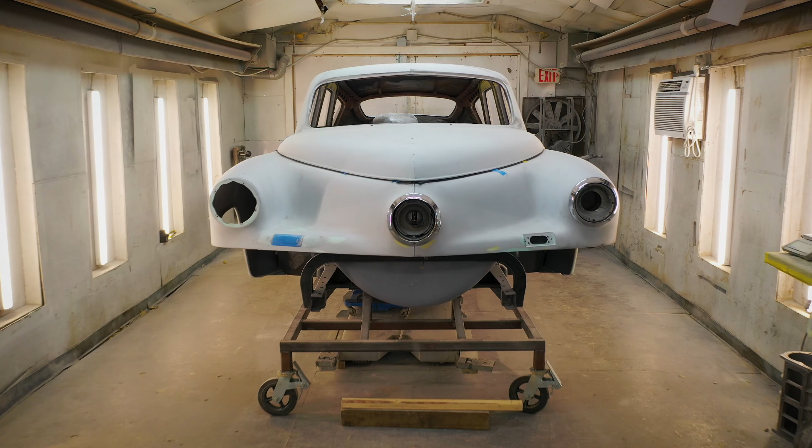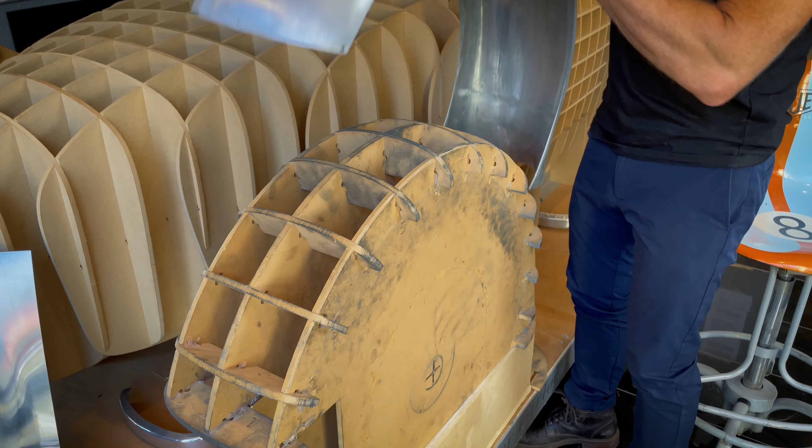It's very exciting to bring history to life. And that's a hard thing to do. All of the components that create a car need to not only look the part, but they also need to work in harmony. They need to fit within that body with no compromise to the design. And the one area that just seems to be stuck in the dark ages is the metal shaping. I mean, we're still shaping metal the way the guys did those armored suits.

So just in time of making visionary engineer Preston Tucker's mythical car, along comes Figur.

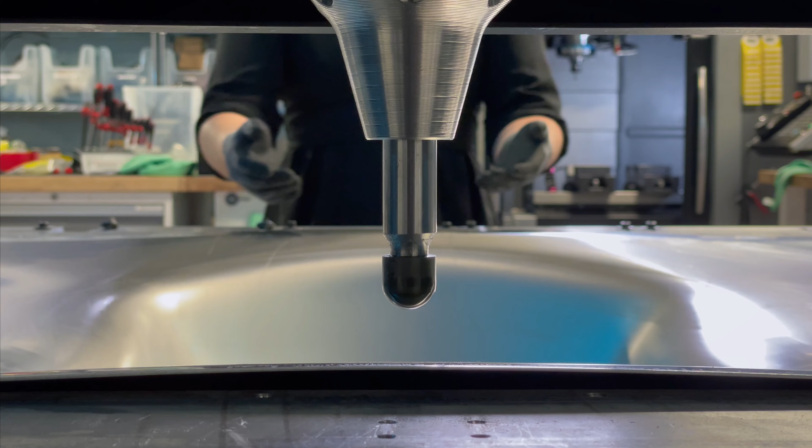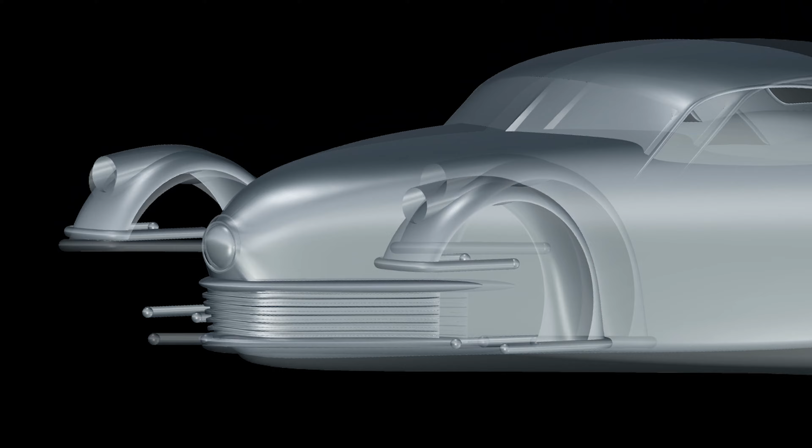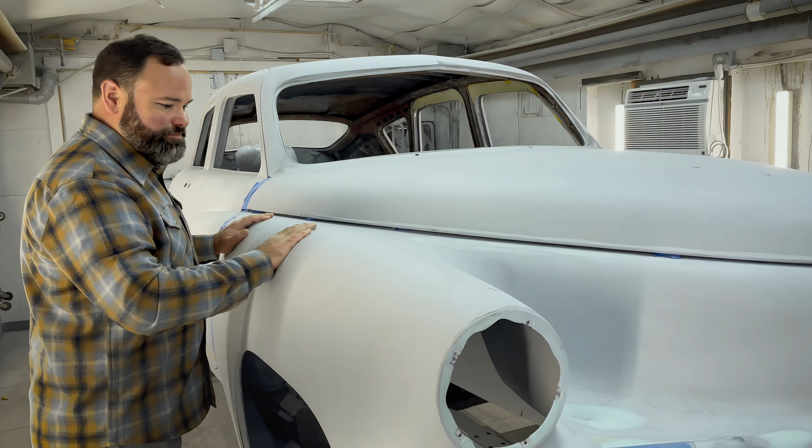Preston Tucker was a visionary, and if you're a car person, you know about him and you have studied the things that he did. He was everybody's hero. After World War II, my great-grandfather, Preston Tucker, started a company called the Tucker Corporation, in which they developed a car called the Tucker 48. They called it the car of tomorrow today. He took advantage of public interest in a new automobile after World War II, delivering what people really wanted in a car that was safe, it had performance, it was affordable, you could use it with your family.

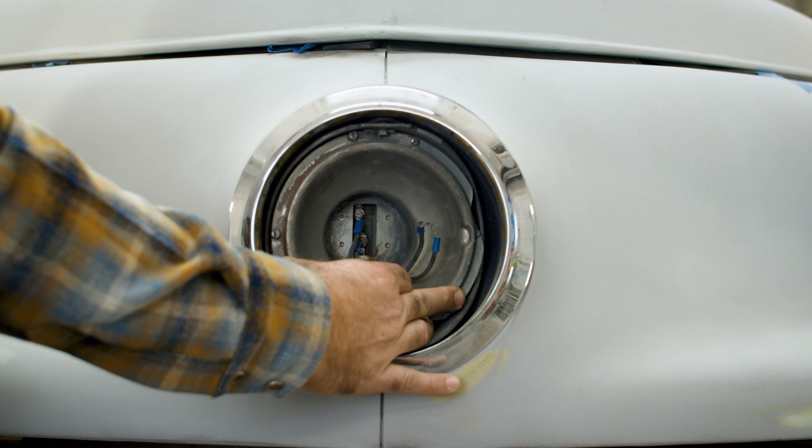So Preston Tucker was really 20 years ahead of most of the innovation that was happening at the day. My grandfather was a dealer for Tucker. He bought a dealership in New York. And for the rest of his life, he talked about how exciting that was, how many people came to the showroom, put orders in, expected to get a car that was like no other.

But that didn't happen. Eventually, some of his more creative fundraising techniques got him in a little bit of trouble with some of the government agencies that were paying attention, and they ended up putting him on trial for fraud. The good news is he was found not guilty, but unfortunately his company was destroyed and went bankrupt at that time. After the 51 cars were made, the factory was closed down and Tucker was out of business.

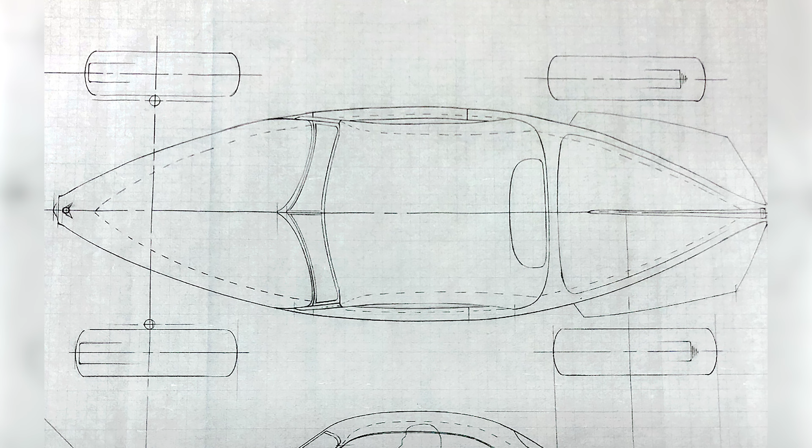So a normal person maybe would have been fairly discouraged, but Preston Tucker decided that he was just going to work on his next new big idea, which was the Tucker Carioca. It's a boat tail fuselage, two-seater, motorcycle fenders, exposed wheels, rear air-cooled engine. So he was going to produce the car potentially in Brazil in kit form and have them imported into the United States and assembled at local dealerships, so that somebody could have kind of a neat little fast two-door sports car that was inexpensive and had all the things that people were looking for.

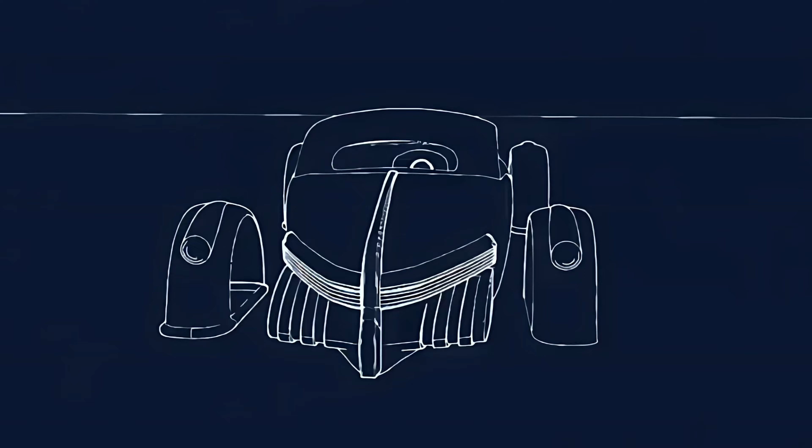Unfortunately, he died before the project was really able to get out of the industrial design phase. The Carioca is the manifestation of his last design, his last concept.

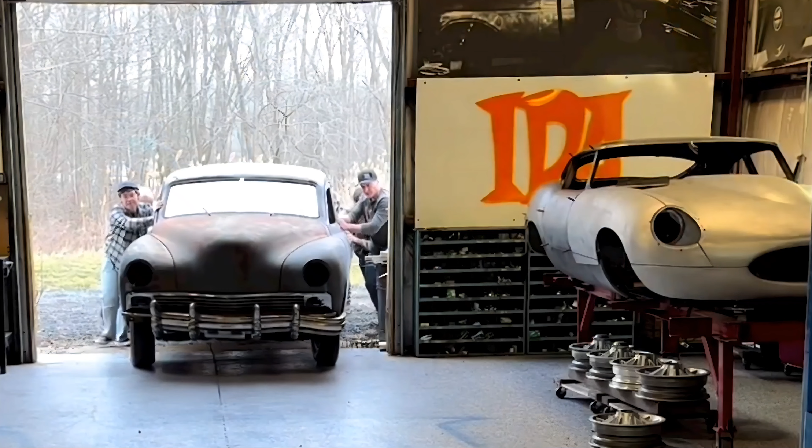So the Ida family has been involved in Tucker since the beginning. The love for the car and the product and Preston Tucker's ideas stayed in the family, and it's been a part of who we are. We have a custom shop here in New Jersey where we custom make vehicles, hot rods, and other concept cars. And we've decided that it would be a lifelong dream to own and create the Tucker Carioca car.

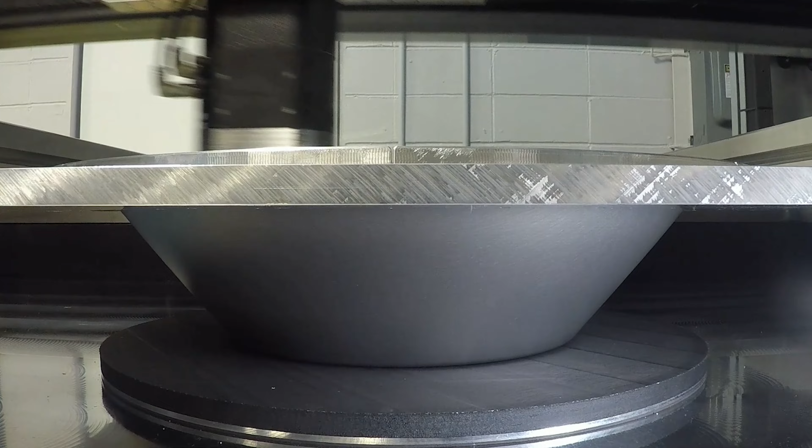And thanks to Figur and the CNC magic of metal shaping, we'll be getting there a lot quicker. The modern equipment that's available today from the Figur folks with sheet metal forming allow us to take some of these concepts from the past and actually turn them into tangible things rather than just designs on paper.

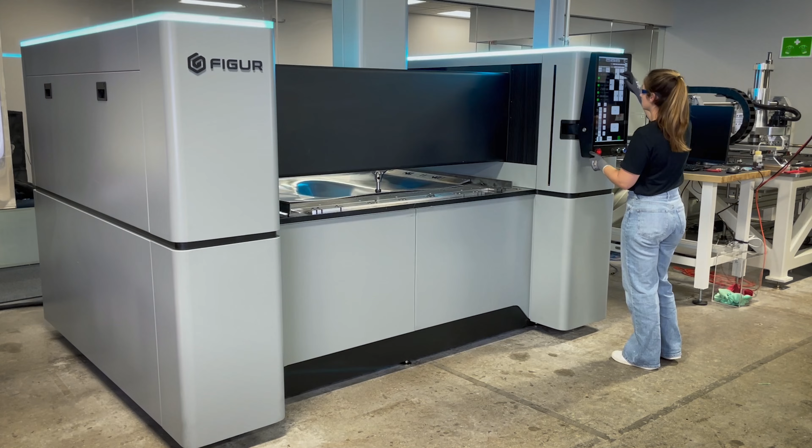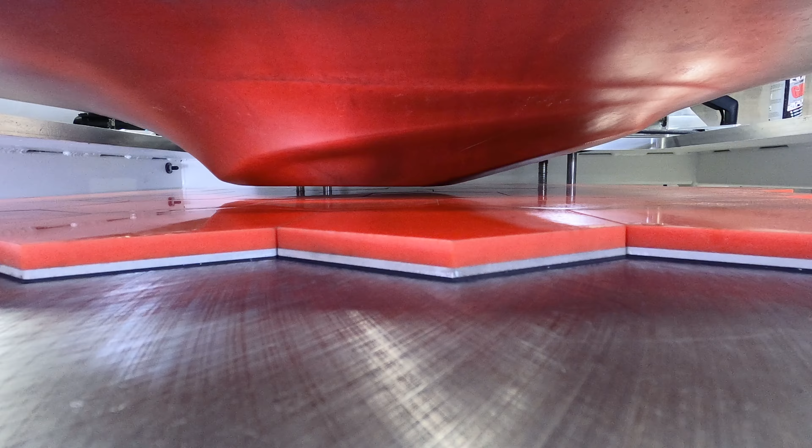The Figur machine is absolutely genius. What it's doing, it's using a high pressure tool that is pushing down on the sheet metal against the silicone backing. With that high pressure, it's pushing and it's creating the perimeter of the shape. And then it keeps pushing down, stepping down, stepping down, stepping down, until you have a fully shaped three-dimensional contour, that is up to 16 inches of depth and in minutes, with a surface that is ready for paint.

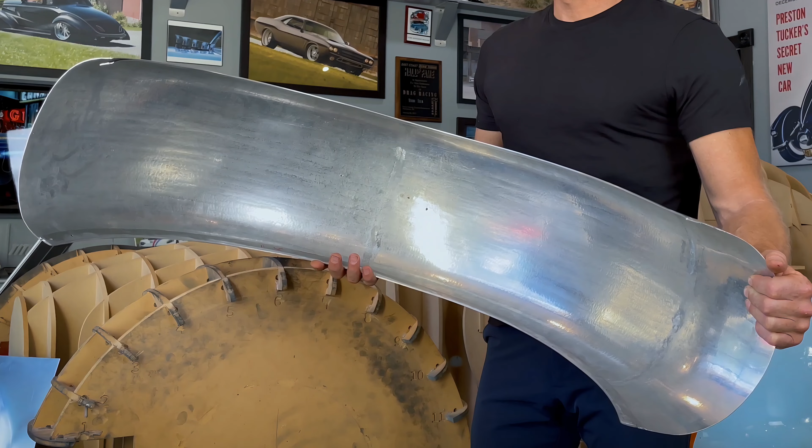We're looking at the left front fender of the Tucker Carioca, and I made this by hand, and this part took me nearly 40 hours to make and finish. And the Figur version of this fender was made in less than 1 hour. And it's made with draft, so that the part can be fabricated, cut out, and later welded into one piece.

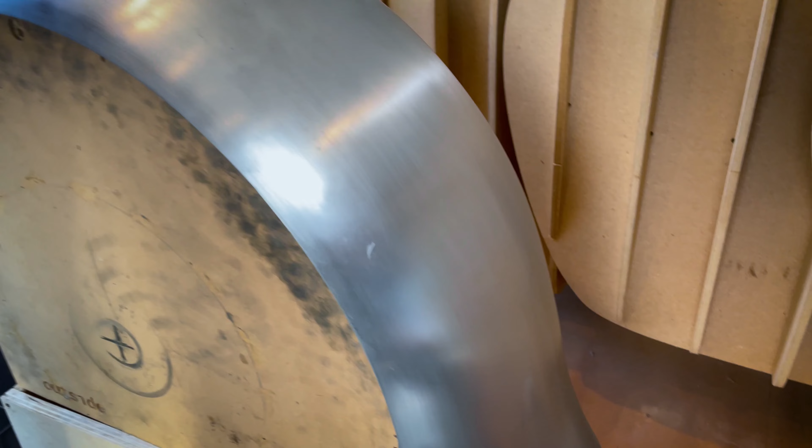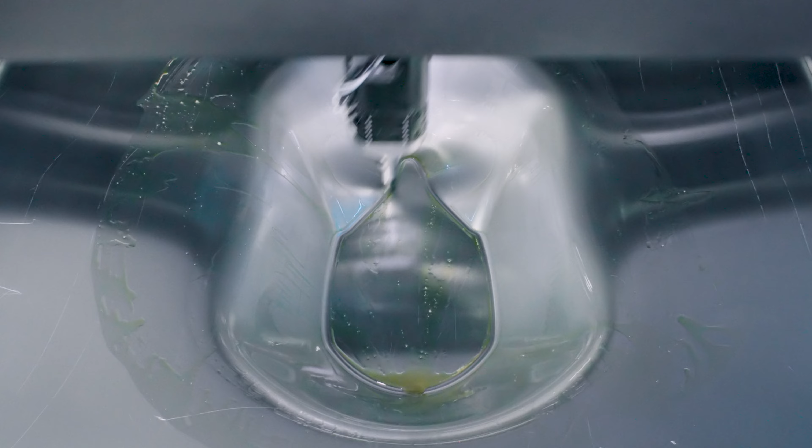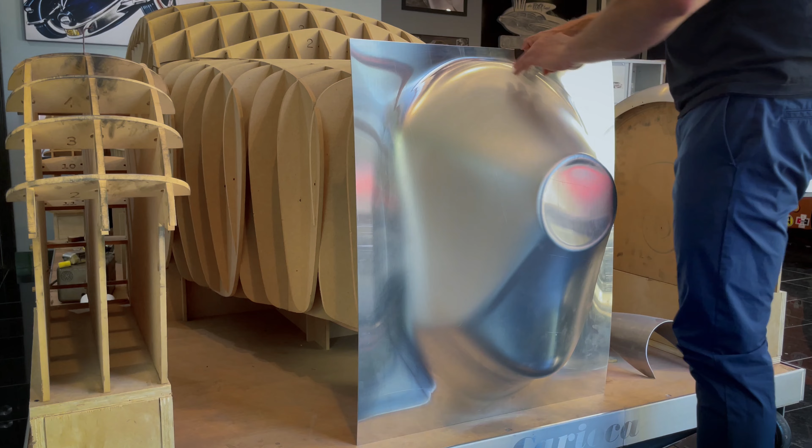In the Carioca, there are some really challenging panels. A perfect one is the nose. It's kind of a pointed nose. It has a headlight in it. And to make that out of sheet metal by hand would be ridiculously challenging. And if you could see, this part fits the buck nearly perfect, and it was made in 35 minutes. The Figur technology can shortcut that and make it easier for Rob to use his talents to put the whole thing together and make it look great.

I've heard some people say, oh, this Figur machine is going to put metal shapers out of business, and I don't think that's true at all. In fact, I think it'll increase the need for talented metal shapers, because as we know, the Figur machine can shape a part, but then after that process is complete, that part then will require a talented metal shaper to be able to weld and attach and fit to the next piece.

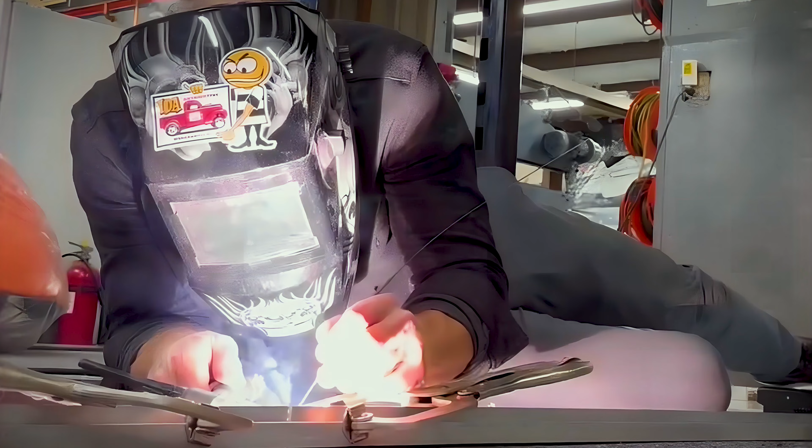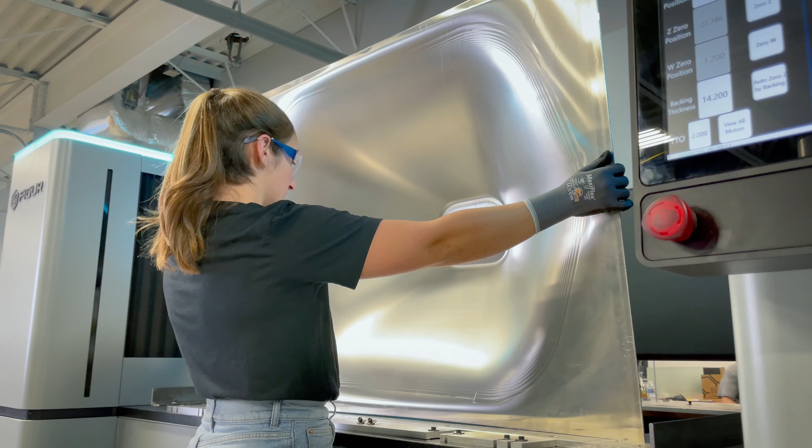If you're trying to run a business and you need to hand a customer a bill that also makes sense to you, efficiency is key. Quality needs to be number one. It needs to be done in a timely fashion. It needs to be consistent. And hand shaping one side, making the other side look just like it, that becomes a challenge. On a Figur machine, we can simply mirror the program.

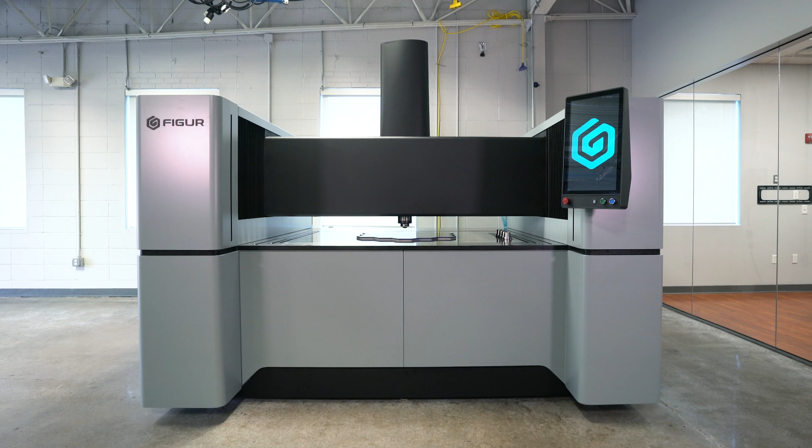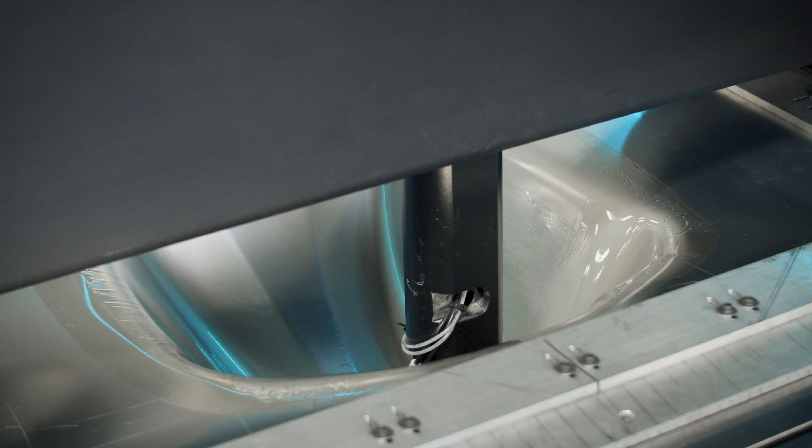Preston Tucker was always looking for the next best thing. So I think if he had these innovative tools we have, he would have fully embraced them. Tucker was a visionary, and he was often criticized because he was so far ahead of his time. This is right up his alley. He'd lose his mind to have the availability of technology like this. If he could have had a Figur machine in his shop, he would have.

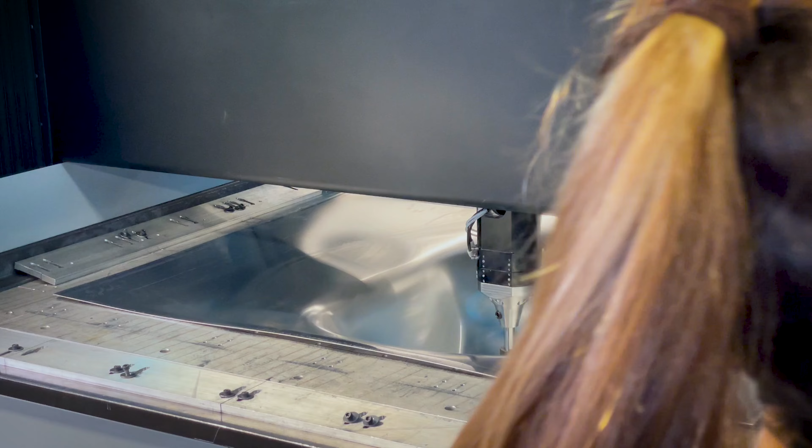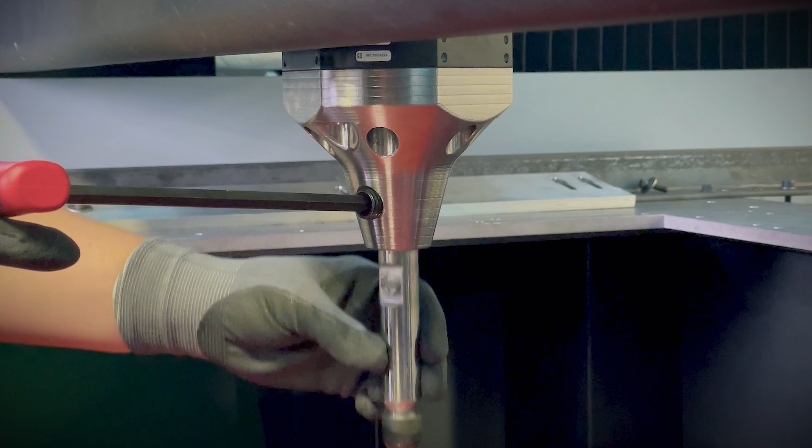He was looking for ways to do things faster and better, and that's just what the Figure machine will do for us. As an engineer, you always hope that you could be at that level, like Preston, like Elon Musk. And to have a little part of bringing what Tucker wanted to do in the 50s to fruition makes us feel like we're a part of history. And it's incredible to have technology like Figure help us bring history to life.